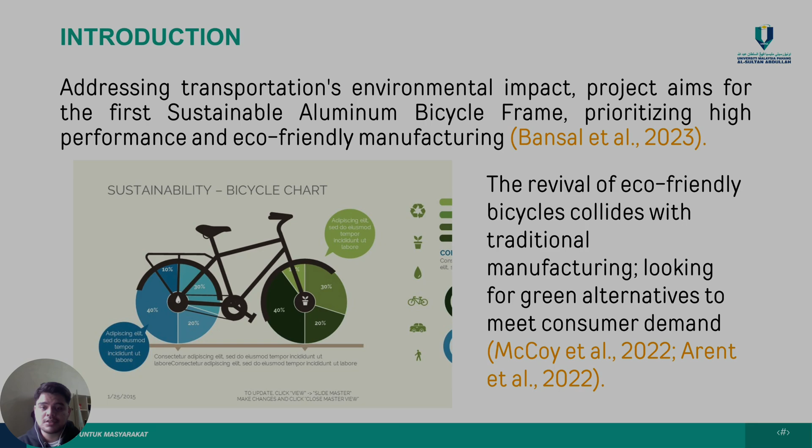Then we move to the problem statement. Traditional bicycle frame manufacturing involves resource-intensive processes, material waste, high energy consumption, and non-renewable materials, demanding a shift toward sustainability for ecological harmony.

For the objective, we need to develop and implement a sustainable aluminium bicycle frame manufacturing process, emphasizing eco-friendly material selection, efficient design, and responsible production to reduce carbon footprint significantly.

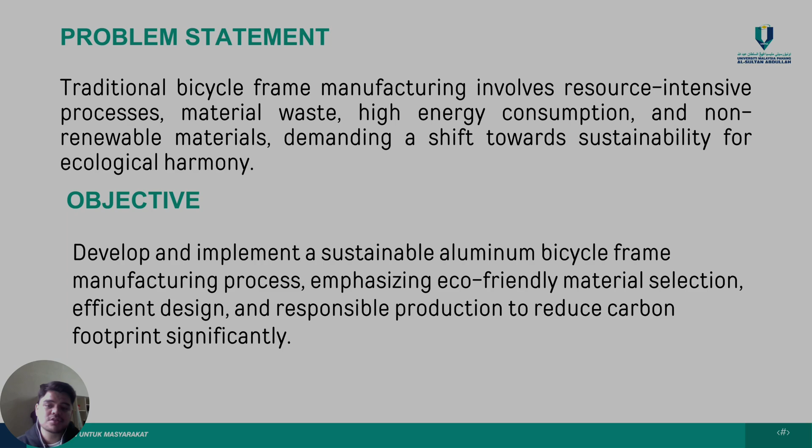My name is Lim, with matric number MA20061, and I'll present about the material design and processing part. Most importantly, the choice of material used in the sustainable aluminium bicycle frame project is essential because it should provide structural integrity and environmental responsibility.

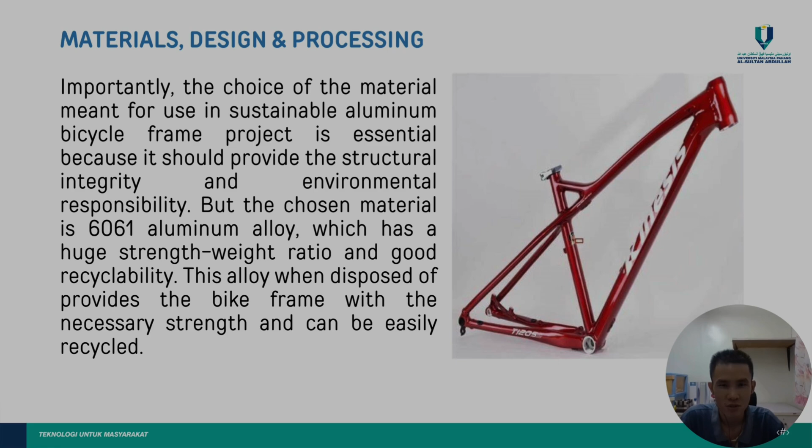The chosen material is 6061 aluminium alloy, which has a huge strength-to-weight ratio and good recyclability. This alloy can provide the bike frame with the necessary strength and can easily be recycled.

For the machinery selection, first the CNC machining centers. The CNC machining centers can shape the aluminum frame components with precision. The recycling system efficiently recycles the aluminum scrap during machining.

The quality control tools can ensure precise dimensions and a high quality finish for the project. The energy efficient tools can minimize energy consumption during manufacturing.

And most importantly, safety equipment. The safety equipment ensures workers' safety during the manufacturing process, and the renewable energy integration utilizes renewable energy sources for manufacturing.

The last one is documentation tools, which will record and document the manufacturing process.

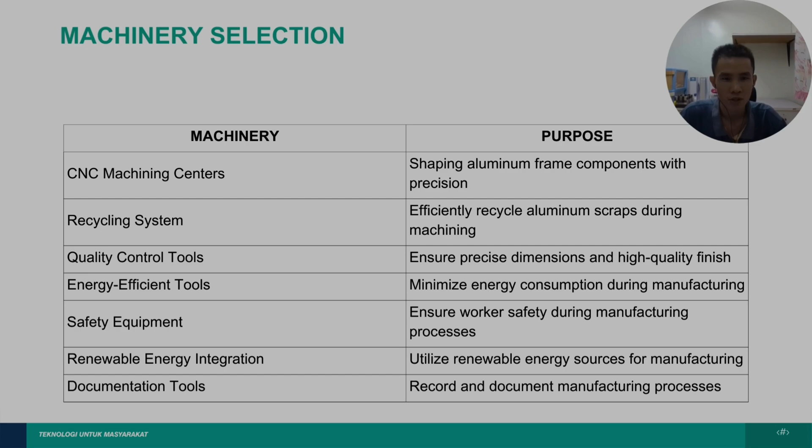All this equipment settings will prioritize energy efficient appliances and make sure the system integrates seamlessly. It also includes regular maintenance and calibration for optimal performance, and operator training programs to ensure safe and effective operation.

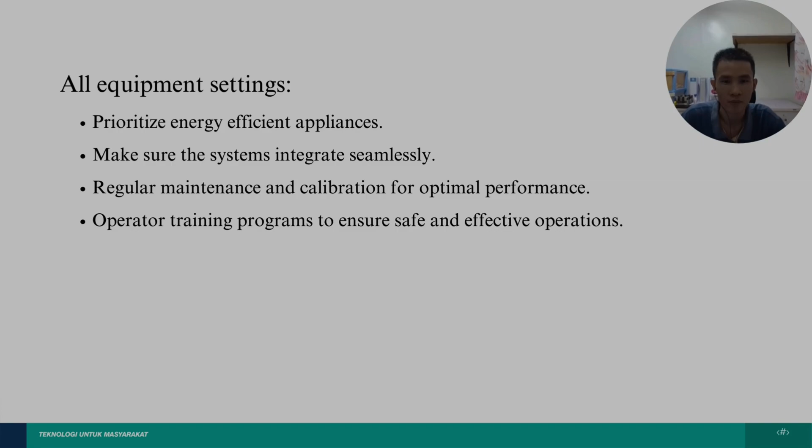For the material testing of the project, the 6061 aluminum alloy suitability was ensured through rigorous material testing procedures. This alloy was mechanically tested to ensure its strength and fatigue resistance, which are essential factors for the bicycle frame operating in a harsh environment.

Furthermore, corrosion resistance tests were made to ensure durability, as the bicycle will be used in various climatic conditions.

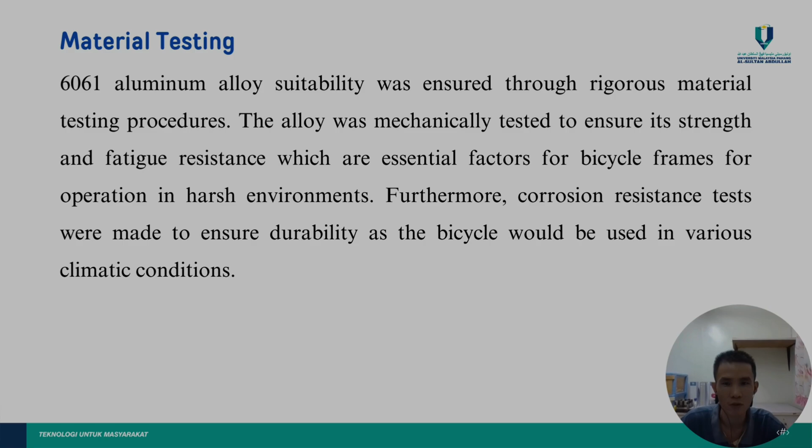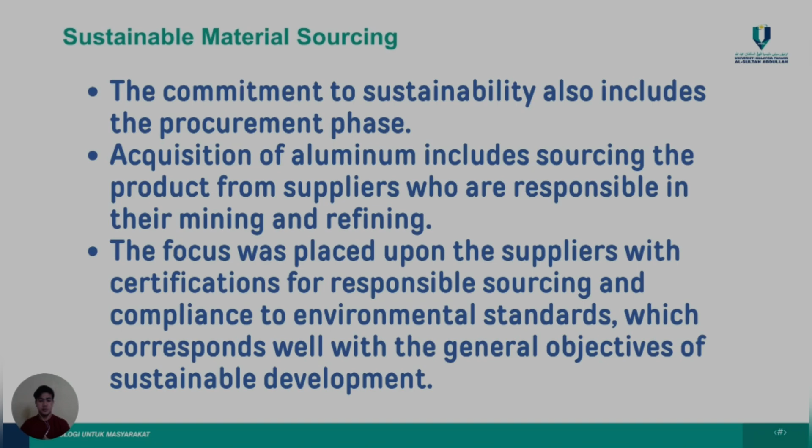Now we go to sustainable material sourcing. The commitment to sustainability also includes the procurement phase. The acquisition of aluminum includes sourcing the product from suppliers who are responsible in their mining and refining. The focus was placed upon suppliers with certification for responsible sourcing and compliance to environmental standards, which correspond well with the general objective of sustainable development.

For material preparation, the first step is aluminium pre-treatment. The quality raw aluminum sheets get a good pre-treatment, then surface treatment or coating are applied to improve corrosion resistance.

The second one is cutting and shaping. Aluminum sheets are positioned and cut to shape, in the appropriate dimension for a bicycle frame, optimizing cutting patterns to reduce material waste.

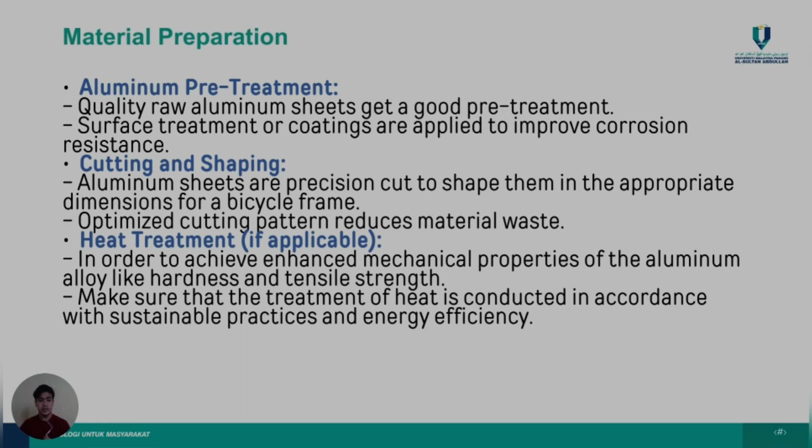The last one is heat treatment, if applicable, in order to achieve enhanced mechanical properties of the aluminum alloy, like hardness and tensile strength, making sure that the heat treatment is conducted in accordance with sustainable practices and energy efficiency.

Now we go to the recyclability consideration. The construction was designed to ease the disassembly of the bicycle frame, making recycling at its end of life easier. This closed-loop system itself is part of the circular economy as it lowers our environmental impact.

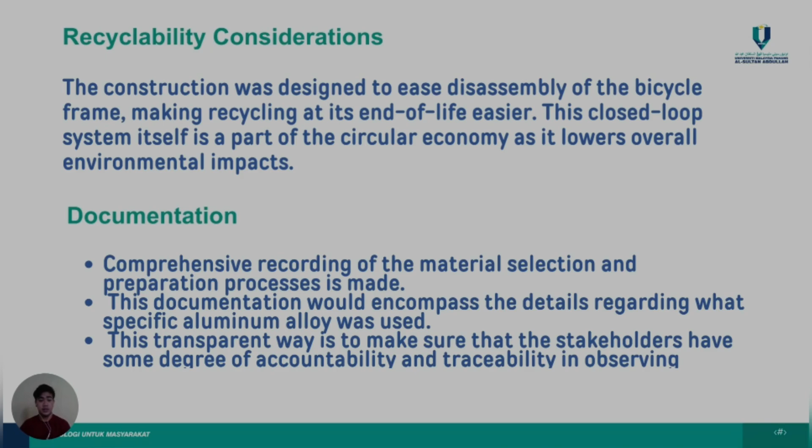For the documentation, a comprehensive recording of the material selection and preparation process is made. This documentation would encompass the details regarding what specific aluminum alloy was used. This transparent way is to make sure that the stakeholders have some degree of accountability and traceability in observing sustainability standards. So we go to the next presenter.